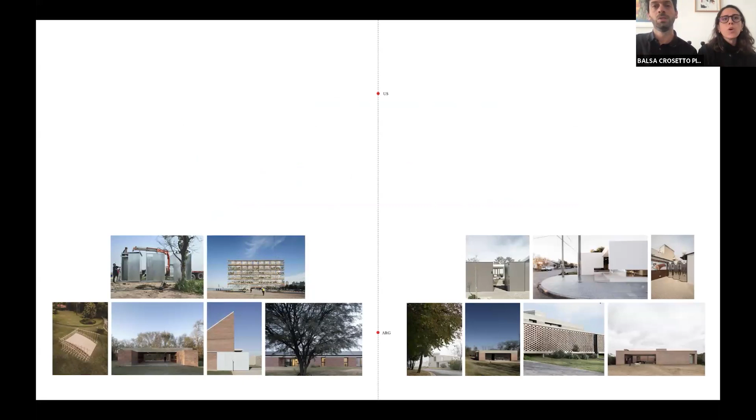Both territories, the US and Argentina, are crucial to our work. Argentina has allowed us to design and build projects that are central to the formation of our office, while the US has given us the opportunity to be part of relevant disciplinary discussions, to engage in other types of projects which are the test ground of new ideas, such as installations and exhibitions, and very importantly, to teach and to be part of the American academia.

From the start of our work as Balsa Crosetto Piazzi, we have been obsessed with popular, vernacular, and productive infrastructures, especially those found along the roadside. We spent many hours on the car driving from one construction site to the other, and these particular architectures started to create a strong visual inventory for our work. This obsession remains with us now in the US. These architectures have become reference for our projects and the built stories that live within them.

Episode 1, Designed to Disappear. The first project of this episode is the Bial Pavilion. This is the city of Rosario, an Argentinian city on the banks of the Paraná River. Rosario is Argentina's second largest port, and this is where the project is located.

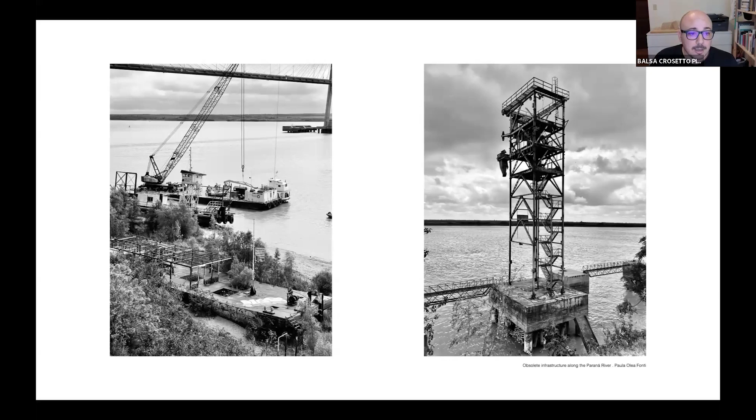The opportunity for the pavilion arose for an open competition for the 2014 Ibero-American Architecture Bienal, the BIAL, and the competition brief called for the design and the construction of a temporary pavilion in a public space located within the port. The project will be situated in a small plaza between the two warehouses that will house the biennial exhibitions, a site historically marked by ephemeral port infrastructures once used to load the ships. We chose to celebrate this story through a pavilion whose tectonic expression will recall these forgotten architectures.

The competition imposed two key constraints that define the project's strategy. The first one, a very small budget for the required square meters, and secondly, the pavilion had to rest on historic paving, which could not be damaged during the 3 months of the installation period.

Given these constraints, we decided to rent scaffolding for the 3 months, as it was a structural system we could borrow and adapt for this project. At the same time, the system allowed us to explore an architectural language where both assembly and disassembly became an integral part of the design process. After its use for the event, the pavilion will totally disappear, ready to become part of the new architectures elsewhere.

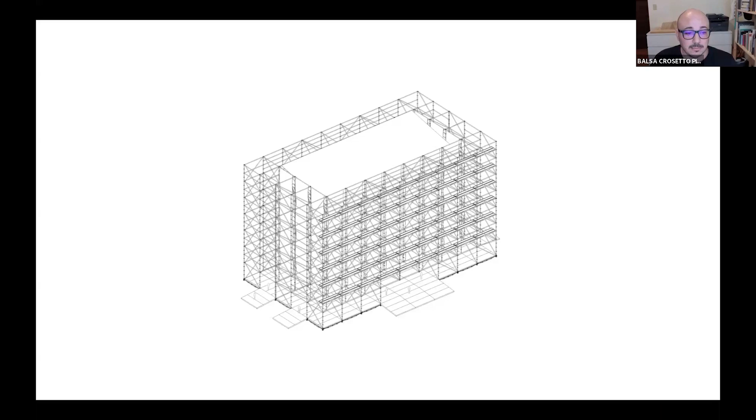We had only 3 months to design the pavilion, so choosing a modular, ready-made, and quick assembly structural system allowed us to reduce the technical complexity of the project. Construction took only 3 days.

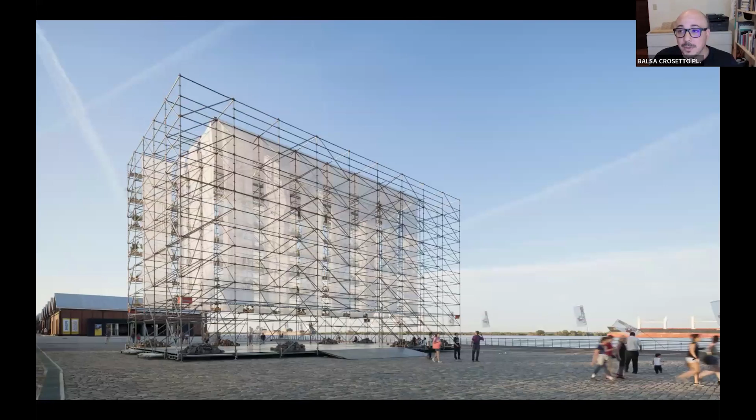The result was a structure gradually inhabited by plants and fabrics that move within the wind of the Paraná River. Inside, the pavilion had no specific program. It became an open space that enabled public activities for the biennial.

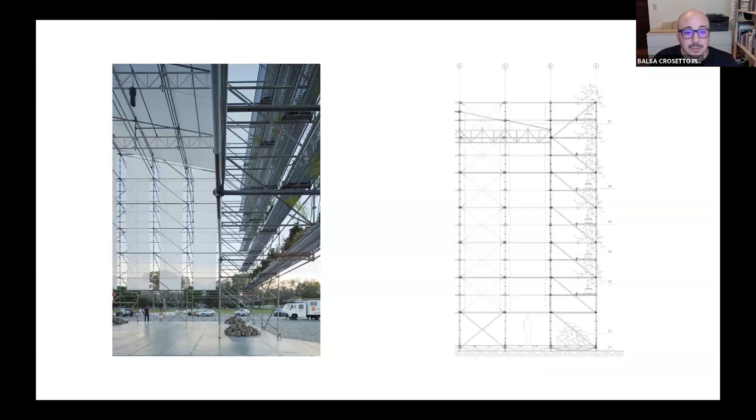All the efforts were focused on defining the tectonics. The enclosures were made with a type of fabric commonly used in local agriculture. The plants and stones were borrowed and returned to the municipality after the event.

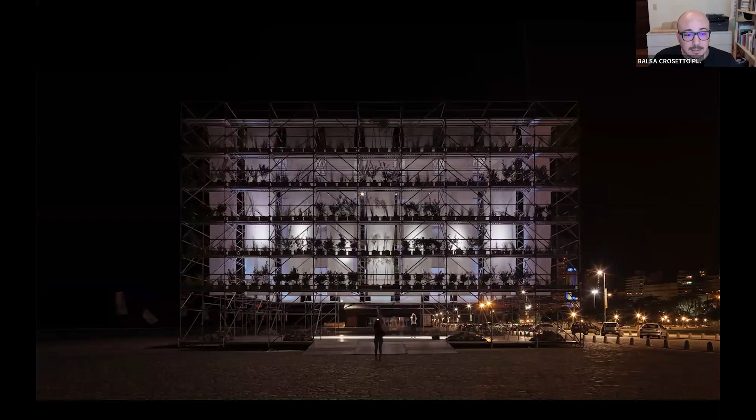The second project of this episode is Rise Repeat. This project is located on the outskirts of Bethel in upstate New York, and it was built within the Bethel Woods Center for the Arts on the historic site of Woodstock 69.

The project was part of an open competition for the Build Fest 2024, which called for the design and construction of a semi-temporary pavilion to be built in just 3 days.

In order to meet this constraint, we studied common construction systems in upstate New York that use off-the-shelf components. So for reasons of cost, efficiency, and speed of assembly, we ultimately decided to build the project almost entirely out of outdoor stair stringers.

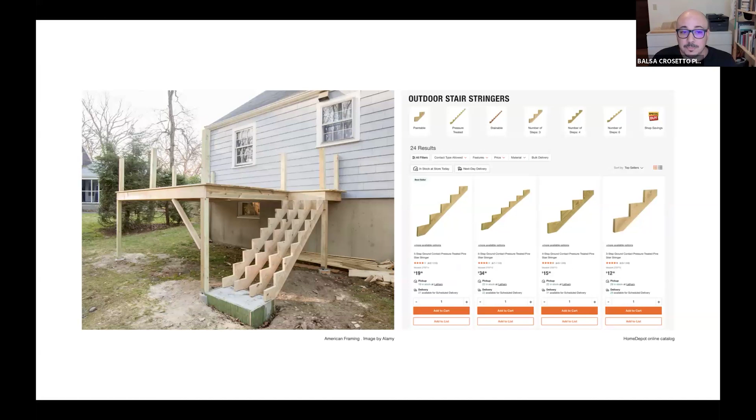It was very important for us that the project's environmental impact be as low as possible. To achieve this, we studied the material life cycle of this component and proposed a design that will allow the pavilion, after its life in Bethel, to be disassembled and reintegrated into its usual life, eventually living on as a part of domestic structures within the Bethel community.

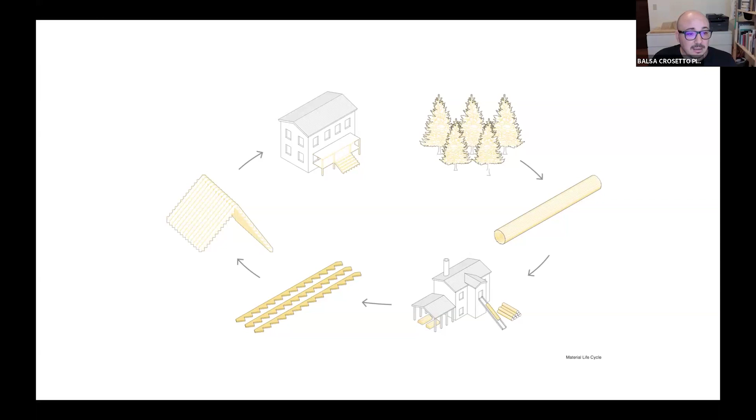Finally, the pavilion is this simple system of wooden porticos that aims to blend into the natural landscape of Bethel. The scale of the pavilion is almost domestic, serving as infrastructure for resting and providing shade, inviting visitors to pause and take in the surrounding landscape. Ultimately, the pavilion is a device for reflection, playfully bringing the everyday domestic component into the public ground.

Episode 2, Small Things in Large Spaces, or Other Ways to Deal with Scale.

These two projects that we will show now in this episode explore the concept of smallness and how projects of a few square meters dialogue with vast spaces, either the expansive territory of the Argentinian agrarian pampas or large industrial interiors.

Rural Restrooms is a project located in the countryside of southern Córdoba, specifically on a family-owned dairy farm. The project emerges from the need to provide additional outdoor restrooms for the workers here.

The particular landscape of the Pampas is defined by its infinite horizon that extends as far as our eyes can reach. However, when visiting the site multiple times, we realized that this infinite landscape was actually inhabited by multiple small-scale productive artifacts, very contextual to the site, such as strange carts for multiple uses, billboards, or agrarian machines.

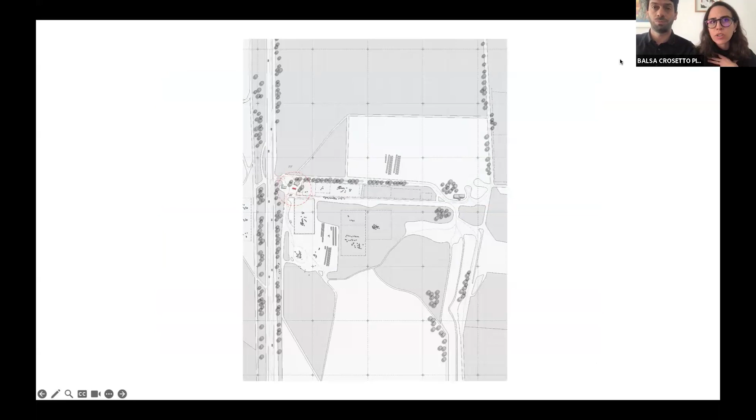This made us think of the project also as a small infrastructure that could set a dialogue with the heterogeneous territory where it was going to be placed.

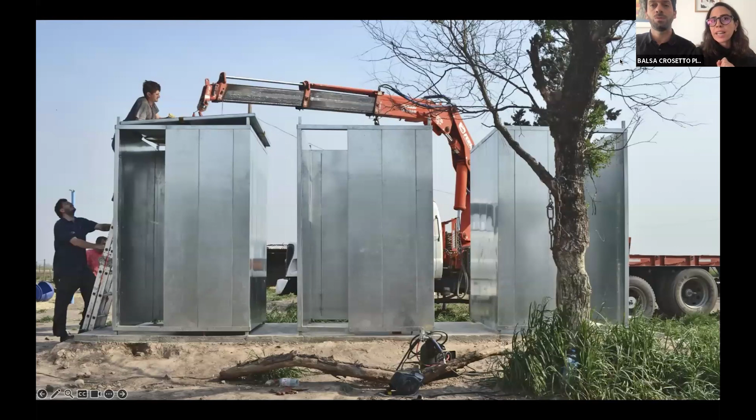We decided to create then 3 boxes, made only by folded sheets of galvanized steel, a material recurrent in this rural site. The galvanized material is crucial for the project as it resists the tough conditions of the rural outdoors: dirt, rain, wind, and sand.

By folding the galvanized sheets, we were able to use only one material, both as structure, enclosure, and finish for the project, a material that also requires zero maintenance.

The whole project was built by 2 local masons, and this man, Rodrigo, the metal worker, or herrero as we say in Spanish, who made the restrooms in his metal workshop and then installed them on the site.

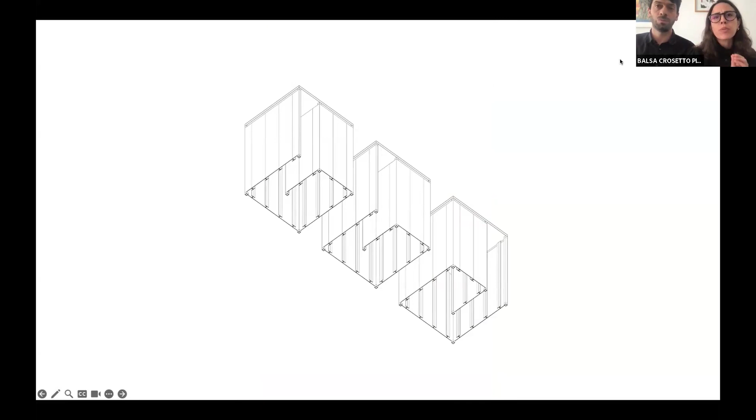The bathrooms are conceived basically as 3 small spaces, 3 small rooms, each offering a separate toilet or shower. For this, we studied the module of the metal sheets and defined 2 ways of cutting them and 4 ways of folding them, which gave us 4 different types of pieces, A, B, C, and D, with zero waste of material.

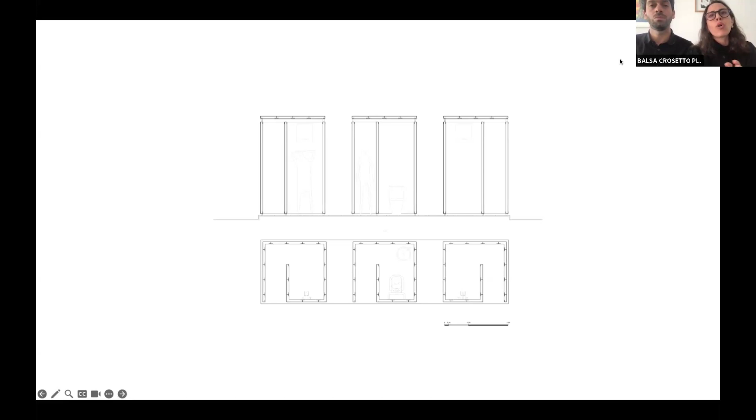Regarding the plan and the section, the project seeks to eliminate both doors and windows. The plan is the outcome of a spiral-shaped layout that replaces the door with an entrance, and the section replaces the windows with just a separation between the metal panels and the concrete floor and the ceiling.

Once the galvanized pieces were assembled, we mounted them on a truck and transported them to the farm. There, within one afternoon, we installed them.

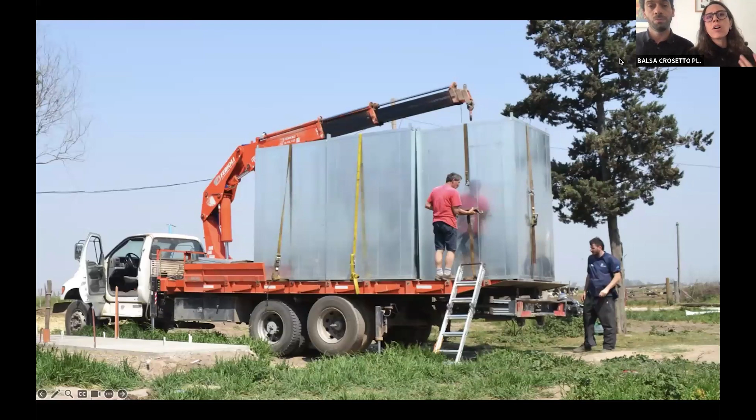Something really beautiful about this project that we discovered while installing it were the reflections that the galvanized sheets captured from the landscape.

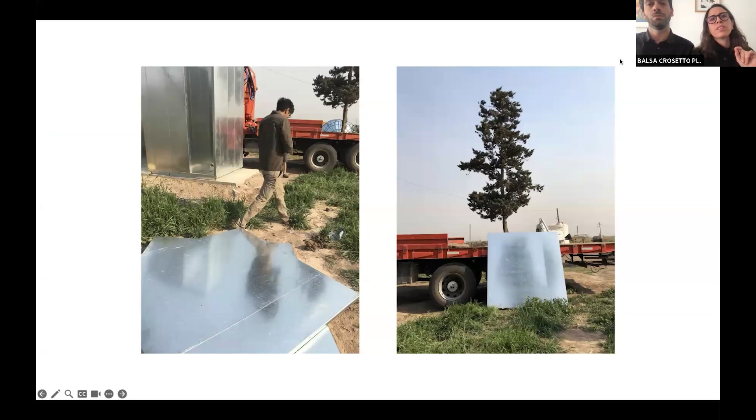Once they were located in place, the panels reproduced the sky and the grass around, giving this small intervention the opportunity to hold deeper and broader dialogues with its context, and even reflect the lights at night, becoming at last another piece of rural infrastructure like the silos for miles around.

The following project is named Animas, and it tackles the challenges of adaptation and reuse of large, if not huge, industrial buildings. The project is located in Syracuse, New York, a city that in the early 20th century was part of the Northern Steel Belt, later renamed the Rust Belt, together with other cities such as Detroit, Chicago, or Buffalo. This condition, common to all industrial cities, created an extraordinary number of buildings that remained abandoned and unused, many occupying large plots in key areas of their cities. The Gear Block, the building in which the project is located, is one of them.

The clients who bought this building during the pandemic wanted to transform it into a communal space, focusing especially on local teenagers and kids, providing areas for art workshops, education, mental health, and events. The building is cataloged as heritage and was previously a truck factory in the 1930s, later becoming the site of the Strathmore Paint Factory, traces of which can still be found on the walls. The Gear Block has multiple fantastic spaces inside: an area intended as a ballet room on the 3rd floor, one on the ground floor that will become an art gallery, the shed for events, the old paint laboratory, and the fabulous basement.

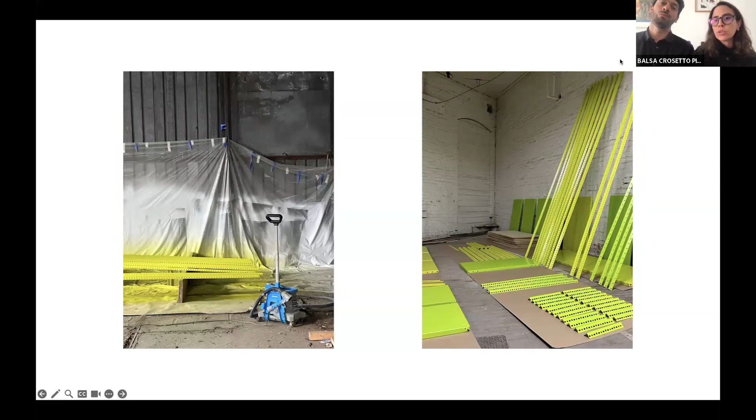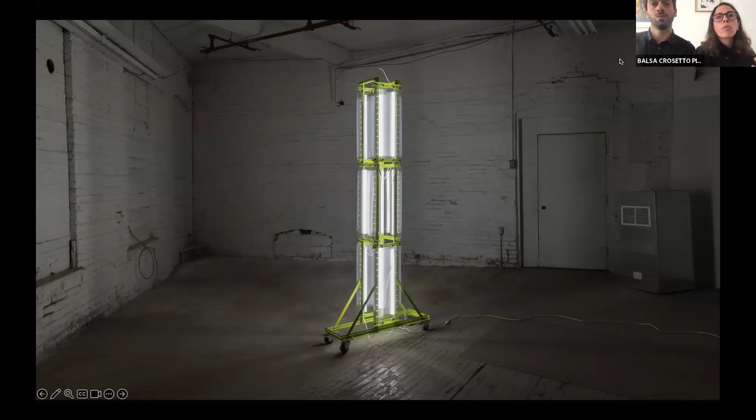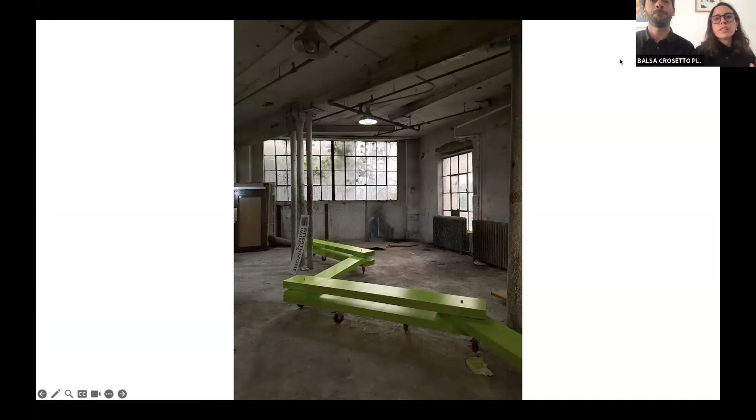Animas is centered on producing a series of architectural elements such as columns, walls, platforms, curtains, pyramids, and benches, as a strategy to activate and occupy the building. This one, called the centipede, is a bench that can take multiple configurations thanks to a pivot point that operates as a joint between the wood planks. We also built platforms for events and performances using found materials, assembled translucent walls to divide spaces, installed curtains used for projections, and created other devices shaped as pyramids, along with very small ones we called mosquitoes.

These elements can move around the building, occupying the basement full of yellow columns, the gallery space on the ground floor, or even being placed all together inside the shed for events. Animas is mostly a project about small transformations for large-scale adaptations. It's a test for quick ways to reoccupy an existing space, and probably an alternative to hack the system a little while larger, more complex rehabilitation efforts are still being approved.

Episode 3: Heavy, Wet, and Dry.

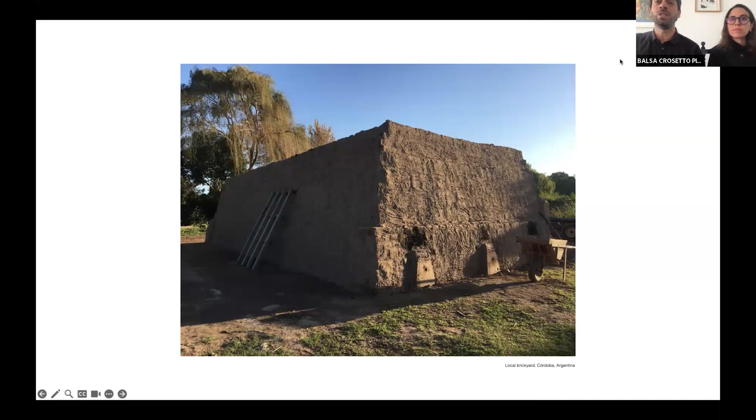The first project is called Quincho. This project is very special to us because it's connected to one of the most important cultural traditions in Argentina, the asado, the barbecue. Córdoba is very popular for its handmade bricks. Cortaderos is the name given to the place where bricks are made. They use natural soil, cut and dried in the sun, then cooked in large ovens also made of mud, as seen in these images. They gain the red color of the clay contained in the natural soil of Córdoba.

To the west of the city of Córdoba lies Sierras de Córdoba, a landscape of small mountains and rivers. In the first valley of this mountainous region lies Lake San Roque, located 30 kilometers from the city of Córdoba. It's a popular getaway spot for city dwellers looking for a break. At the point where the mountains meet the water, we had the opportunity to build a quincho for a family from Córdoba who frequently travel here for rest and recreation.

The construction process was simple. We involved a small local team of builders and used materials available in the area.

The project defines itself as an abstract object that gently integrates into the natural context. We're very interested in the search for a certain geometric abstraction in our work, while at the same time, we operate with a site-specific logic regarding the materials and construction techniques used in each project.

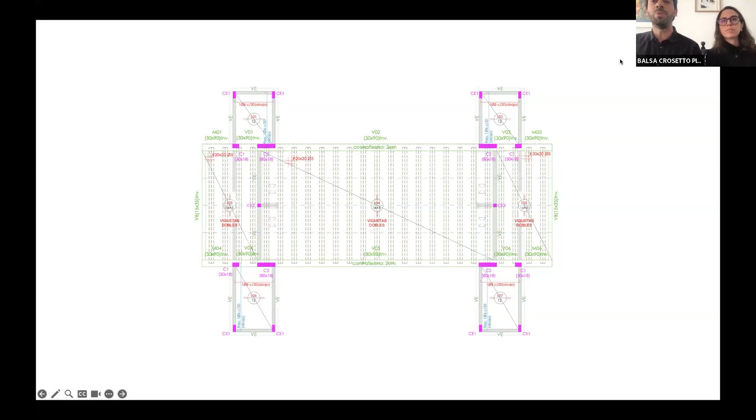We drew very few plans for this project, and the project was mostly built with only one plan, the structural plan. And this made total sense to us. We were essentially building a roof.

The roof is made from small concrete precast beams, which are the most common building material for roofs in Argentina. They are light, so they can be moved by only 2 people.

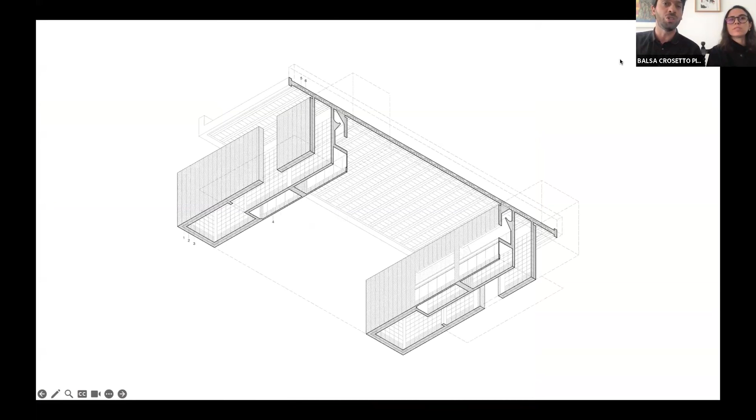The wall thickened to house 2 grills, 2 bathrooms, and 2 storage rooms, while supporting the main space for the asado ritual. They hold the service while allowing nature to flow through the quincho, giving the sensation of barbecuing in the open air. Minimal details and unfinished aesthetic reflect an attitude of responsibility and pragmatism.

No ceilings were added, leaving the precast roof exposed. Electrical wiring runs externally, simplifying construction and reducing future maintenance costs. The quincho operates as an outdoor structure that protects us from the sun and the rain. A small pagan temple hidden in Córdoba where the rite of the asado is collectively celebrated.

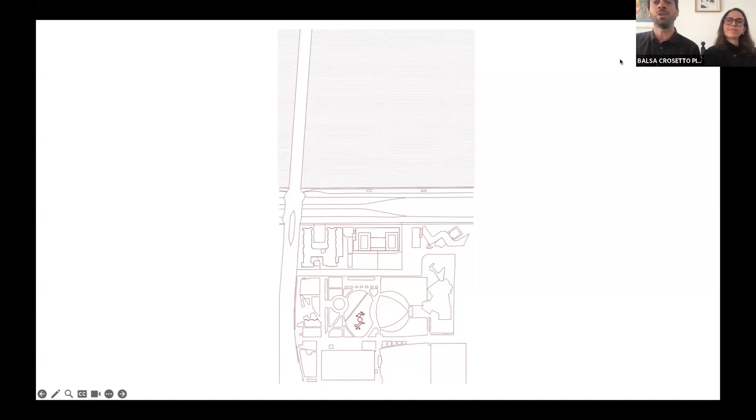The last project we will show you today is 12 Rooms, a pavilion designed for MIT in the city of Cambridge, Massachusetts. Sitting between the 2 Eero Saarinen buildings, the chapel and the auditorium, and in proximity to the Charles River, the pavilion emerged as a brick line, a long, shallow, well-described oval.

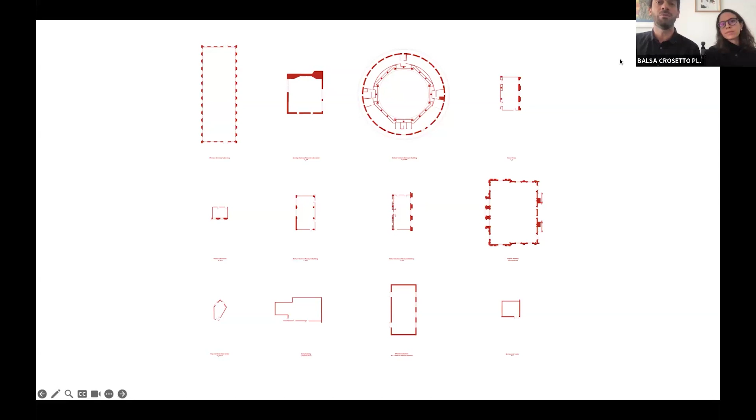This composition of 12 rooms reconstructs the space at MIT where pivotal inventions and research were born. From the telephone and the first digital computer to early prototypes of email, these innovations are inseparable from the labs, lecture halls, classrooms, and offices at MIT, some of which now exist only in memory, remnants of buildings that were demolished. 12 Rooms is between documenting the past and constructing the traces of a new possible space in the present.

The project is an invitation to reflect on the built stories that live in the building with inhabitants, dialogues, and inventions that are part of the room's memory, through the use of brick, a resource strongly tied to Cambridge's history and built environment.

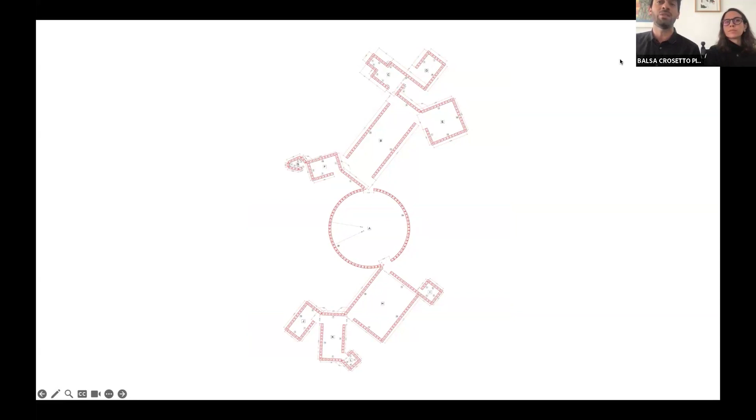12 Rooms assembles a selection of rooms spanning time and space. By extracting the footprints of these rooms, we craft a new spatial composition that allows visitors to step back into the spaces and learn about the groundbreaking inventions that took place within them. The installation is both a reconstruction of old spaces and the trace of a new possible collective space.

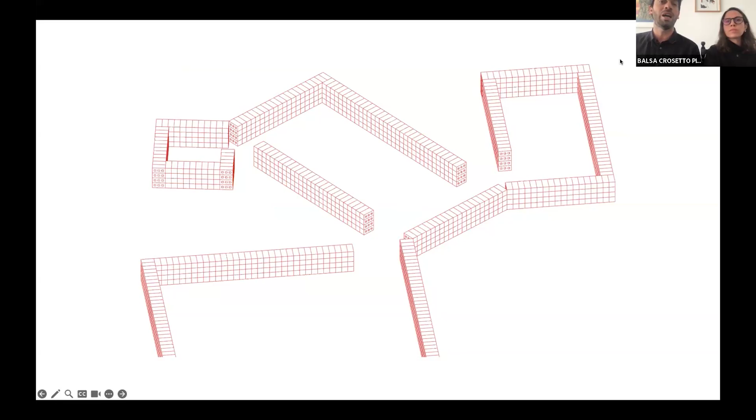The bricks are dry-stacked and tied together in packs of 12 units, a method that allowed for the quick setup of the installation and made it possible to reuse the materials after the project ends. The bricks used in this project were donated by a masonry supplier based in New England. Once the project was completed, the bricks were donated again for the construction of a bike path in New Hampshire.

In this project, one moved beyond time and space to enable other forms of collectiveness and inhabitation. Walls make rooms for things to happen. They are solid and tangible. They are also political. Walls can enable or divide, conceal or protect, separate or hold together.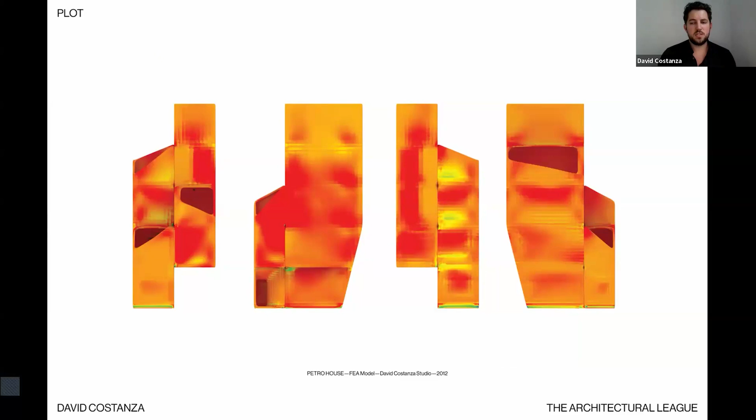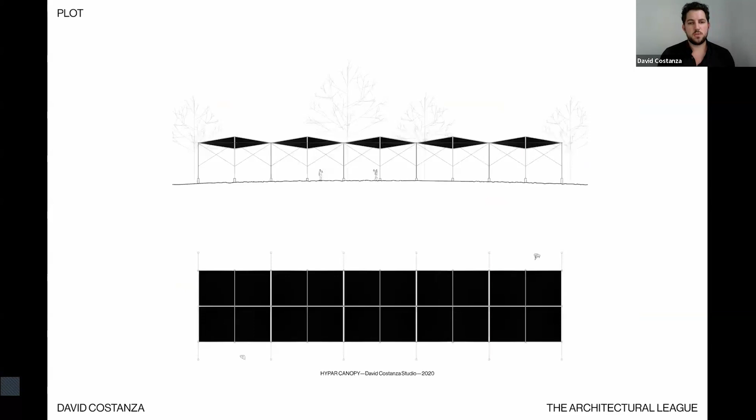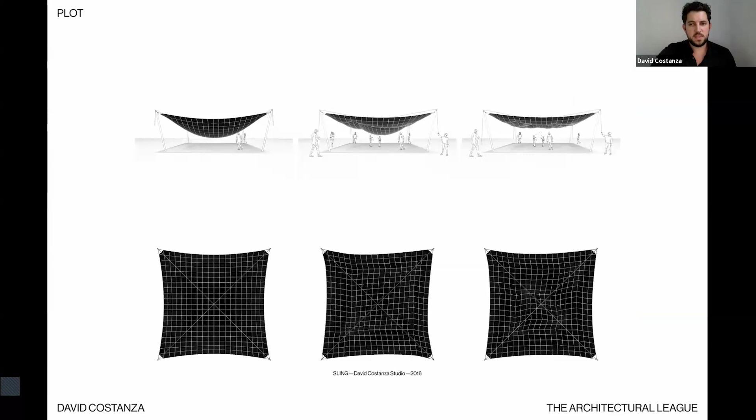So my teaching, research, and practice bridges across design and building, engaging in the reciprocity between how we build and how we design. The work itself is interdisciplinary, overlapping with structural engineering, material science, and computer science. Simultaneously, the work is grounded in architectural expertise, cutting across design, representation, fabrication, computation, and building technology.

In 2015, I established the design office David Costanza Studio, or DCS. Through material experiments, installations, and exhibitions, the studio's work addressed the role of digital processes in architecture, synthesizing the fracture between material constructions and digital technologies.

Thus, the computation, fabrication, and material experimentation came together in a mutually supportive framework, in which the drivers and constraints embedded in material translations informed the design process. The capacity to move fluidly between design, analysis, simulation, machine programming, and fabrication was at the core of the practice.

Over the years, the experiences and prototypes developed in the studio formed distinct research streams that define my current work. The ideas and knowledge acquired through the simultaneous process of designing and constructing, essentially thinking while making, began to expand. And this growth sparked a desire to further enhance my research by exploring the broader connections between building technology and design.

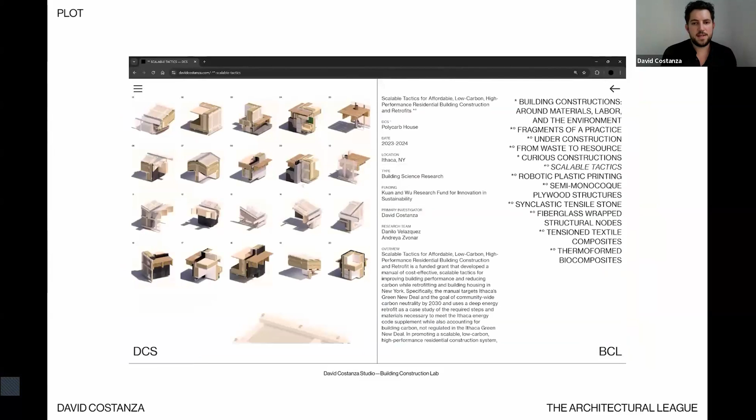This is why, in 2020, I established the Building Construction Lab, or BCL, to advance these research streams further. Each design project, installation, or exhibition became one instantiation of an ongoing research question.

In this way, the Building Construction Lab synthesizes design and research, thinking and making, operating as a framework to interrogate the role of recycled materials, waste materials, prefabrication, labor, and affordability in architecture through the lens of building technology and construction.

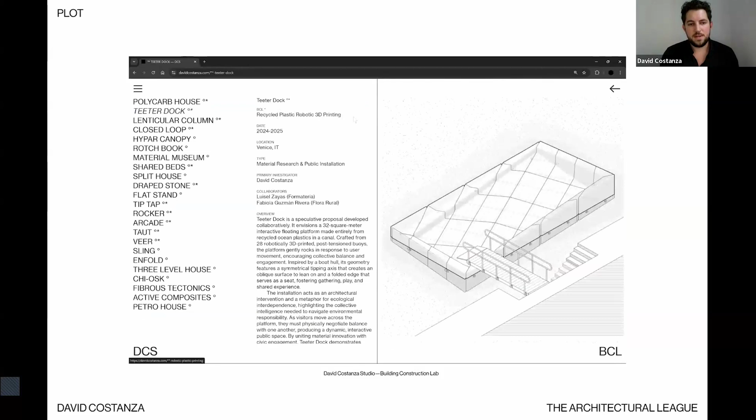So here in the slide, you can see the design studio on the left and the research lab on the right, and the oscillation between ongoing lab projects and instantiations in the design studio on the left.

So this shift also responded to a growing awareness within the architecture discipline of the building industry's effects on the planet. As an architect teaching and practicing during the climate crisis, I felt compelled to examine the role the built environment had in shaping it.

Buildings create about 40% of the world's carbon dioxide emissions, and this fact alone demands that architects rethink how we design and build. To do so, we must interrogate the tools we use to design, the materials we use to build, how and where we build, and what impacts these decisions have on the environment.

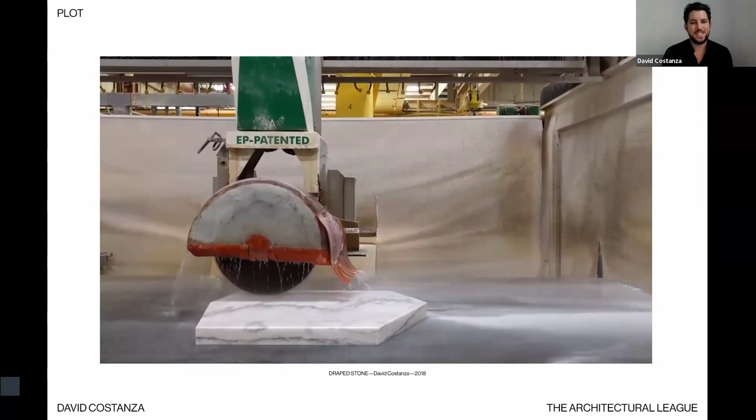These questions can be answered by challenging the role of building construction, not just as an essential stage in the materialization of architecture, but also as a constitutive site for knowledge production. Thus, three main research streams emerged by concentrating on building construction as the driver informing my design practice.

The first stream examines ideas around materials, including low carbon materials, recycling, reuse, life cycle, and affordability.

The second stream deals with construction, which includes understanding and working with diverse labor practices, the effects of automation on de-skilling of construction workers, as well as investigating new applications of prefabrication, digital manufacturing, and robotics.

And finally, the third stream addresses the environment, thinking seriously about what decarbonization means for architecture, how high-performance buildings can be achieved at lower costs, and what alternatives might exist to practices that rely heavily on the extraction of natural resources. These streams, discrete as they may appear, are never studied in isolation, but crisscross each other in my work.

And these research streams interrogate how methods of production condition and shape the materiality, the constructability, and environments in which works of architecture emerge. They seek to identify effective measures for reducing emissions and eliminating extractive and exploitative practices associated with architecture.

My goal is that by elevating building construction knowledge as the inherent site of architectural expertise, a better understanding of materials, construction, and the environment, and the knowledge that emerges from their intersection will inform an architecture that addresses the environmental, social, and cultural impacts of building buildings. For example, the materials we use to build are central to reducing architecture's environmental impact.

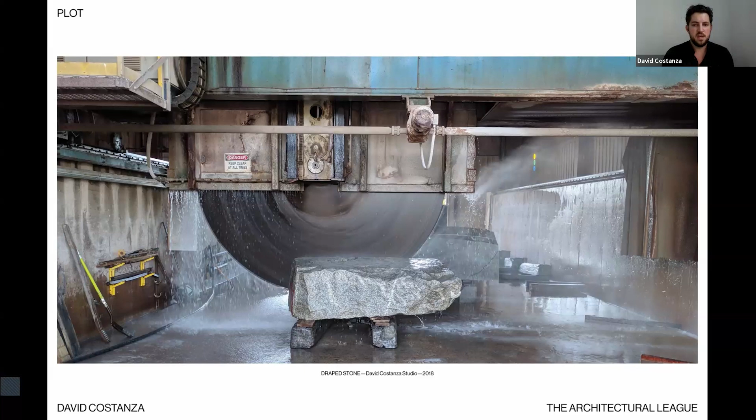Therefore, in my research, the materials focus is studying those of life cycles. Consider my work with plastics. The importance of this research lies in reframing plastics, viewing them not as cheap and disposable, but as essential and irreplaceable. Plastic materials and mechanical properties are essential to building construction and cannot be overlooked.

But a shift from single-use to recyclable plastics, and from non-renewable synthetics to renewable bioplastics, positions this material as not only impervious, durable, and affordable, but also sustainable. In short, a shift from waste to a resource.

Here are a few examples of previous projects that illustrate my approach using plastics in my work. VEER, a collaboration with my colleague Andrew Colopy, investigates the use of waste streams to be upcycled and utilized structurally, informed by material constraints and manufacturing limitations, resulting in a furniture prototype. The material used consists of 60% rice husk fibers, an agricultural byproduct, and 40% recycled PVC, resulting in a fiber-reinforced plastic that offers improved mechanical properties compared to plastic alone.

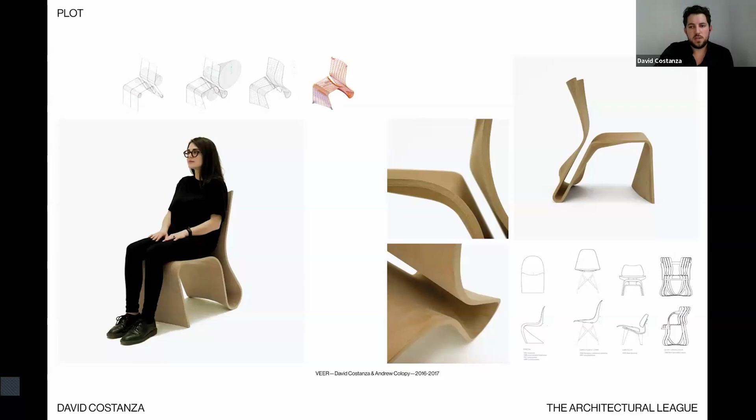The overuse and overproduction of plastics have led to a large accumulation of plastic in the form of pollution. Under these conditions, recycled synthetic plastics already distributed across the planet emerge as a sustainable source material. VEER integrates recycled synthetic plastics with rice husk fibers, which are often burnt at the end of harvest, diverting and repurposing a significant source of pollution, producing a prototype that demonstrates the mechanical, aesthetic, and geometric possibilities of the material.

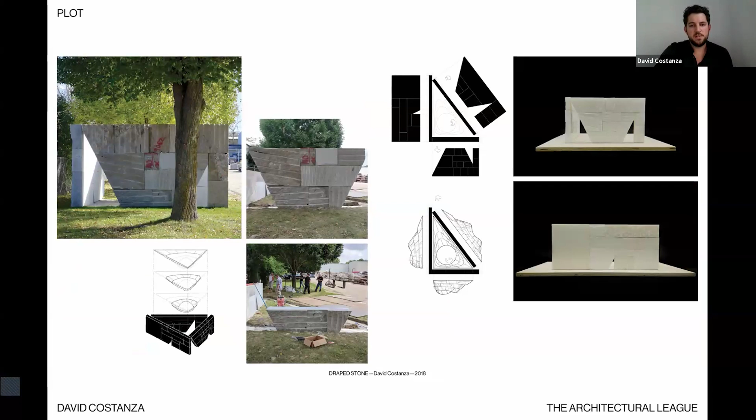Another project is Draped Stone, developed in collaboration with the Cora Stone Company, which investigates the potential to use discarded and low-yield stones in a structural capacity. Many types of stone considered low yield produce vast amounts of waste. The research was guided by the possibility of reinforcing fracture lines and other natural deficiencies in stone with a composite or a plastic, allowing the material to be salvaged and used structurally.

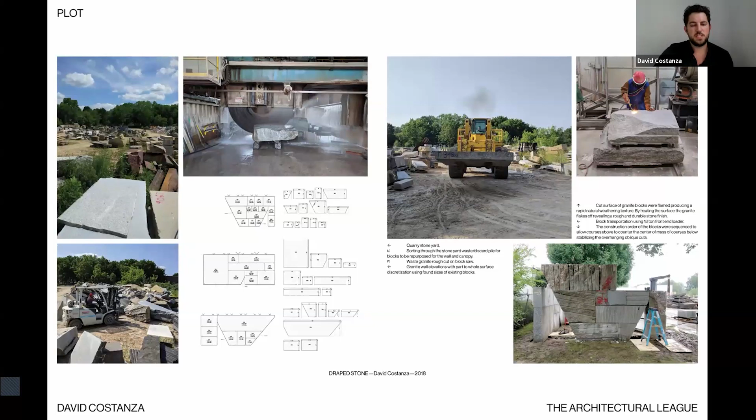The introduction of the composite provided the stone with additional tensile strength, enabling the construction of a hanging granite canopy.

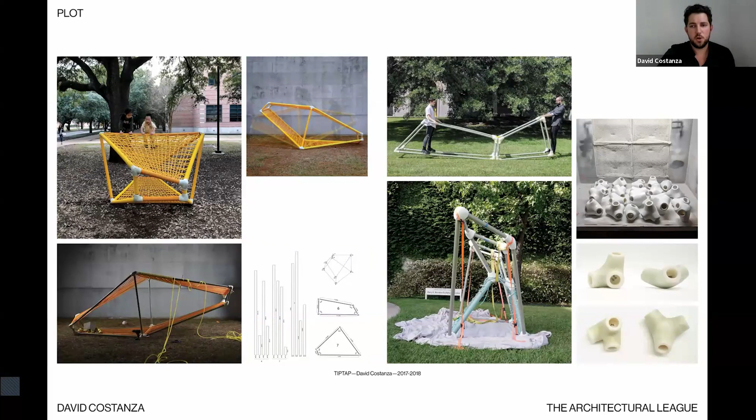In Tip-Tap, bioplastic 3D printing was used as a mold-making technique for a one-off structural node. The node served as the structural connections defining the angles and geometry of the pultruded fiberglass tubes. This structure served as the frame for two woven surfaces, producing an interactive urban object that allowed for sectional occupation. Twisted half-inch polypropylene marine-grade rope was used to construct a soft interface, producing a playful, energetic woven urban object.

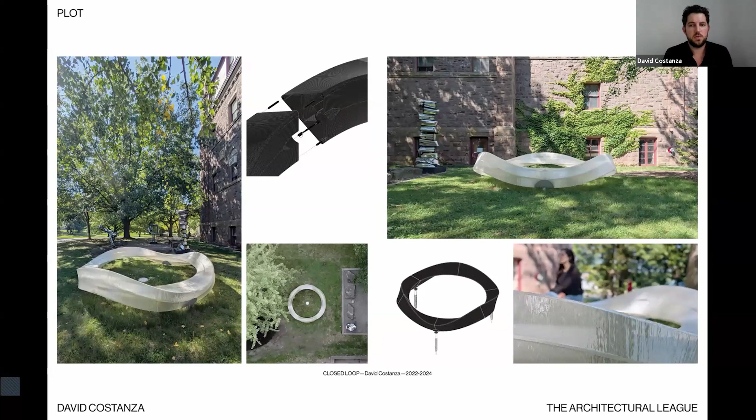Also made using bioplastics is Closed Loop, a public bench manufactured using robotic 5-axis printing. The bench offers a place of pause and rest along primary pedestrian routes on Cornell's campus, aiming to connect often discrete groups or individuals by creating a piece of shared public furniture. Moreover, the project tested the use of bioplastics in structural applications, combined with the automation of production offered by robotic 3D printing.

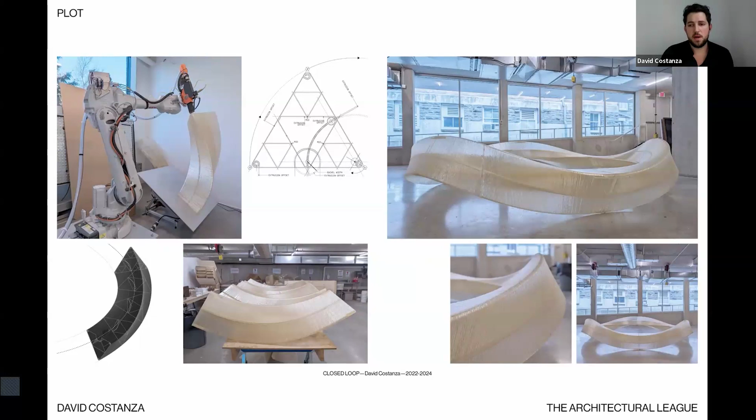Finally, on the use of bioplastics for structural purposes, the Lenticular Column is part of an ongoing grant titled Recycled and Renewable Bioplastics as Alternative Building Components. The research and accompanying building components, in this case a column, aims to demonstrate the capacity for recycled synthetic plastics and renewable bioplastics to perform structurally at an architectural scale through full-scale prototypes, and to develop a workflow for a non-standard automated fabrication process using robotics.

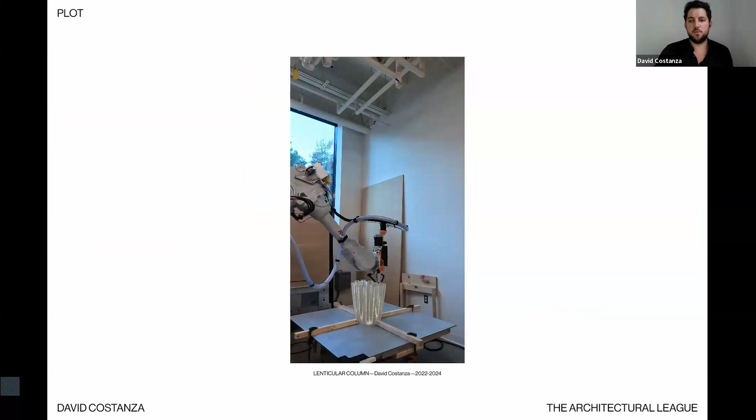The research builds on the processes developed in Closed Loop while beginning to operate at a building scale, so no longer as public furniture. The research continues to expand on robotic 3D printing, offering greater degrees of control while further expanding the scale of the work. Additionally, it reduces the labor required to construct unique, one-off structural plastic components.

These projects demonstrate how an interrogation of building materials is present in my work. Other projects aim to rethink how we build. In this stream of research on construction methods, advancements in automation through digital manufacturing and robotics are evaluated against their potential to impact construction labor.

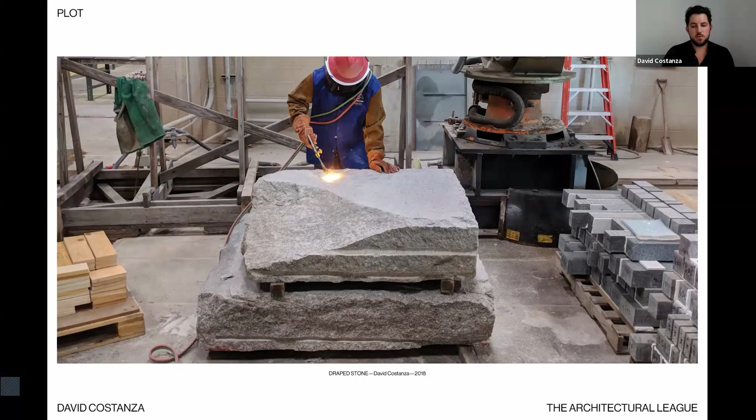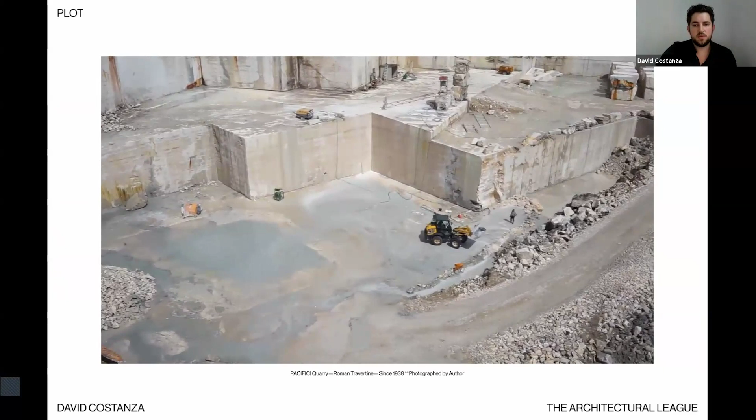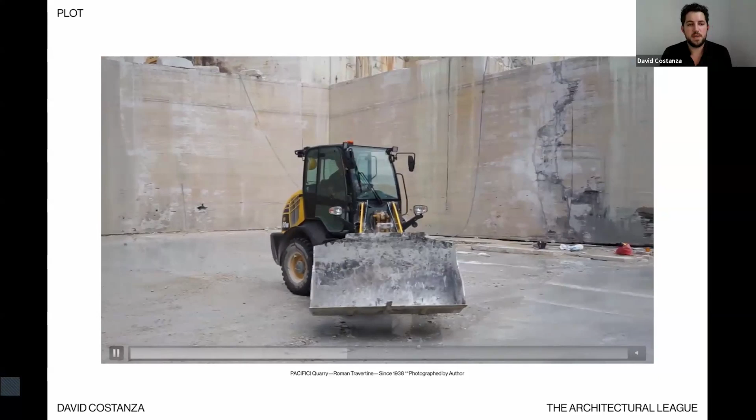It focuses on the labor of construction rather than the labor of production, which refers to the labor required to produce the material products delivered to a building site. When the materials arrive on site, it's a different set of laborers that transform that material through construction.

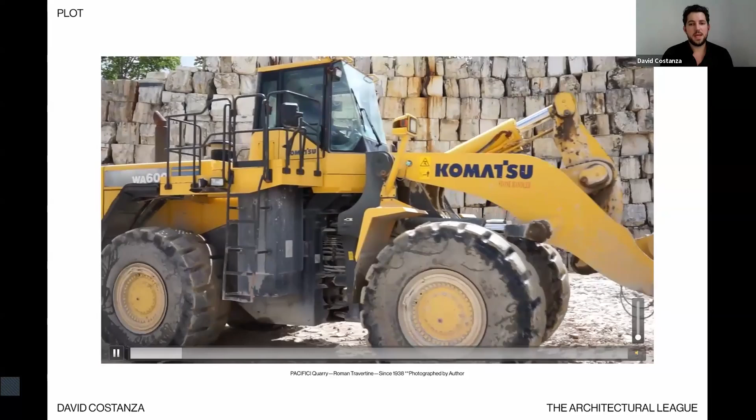In both cases, workers may be at risk. My research highlights the architect's role in shaping labor conditions on site by fostering a critical engagement with construction labor through disciplinary expertise. The following slides present examples of my work where labor is explicitly addressed in both the project's design and conception, as well as its realization.

Taut builds on the work of Frei Otto and the Institute for Lightweight Structures to explore the rapid deployment of tensile structures, which are unmatched in their capacity to enclose large spaces using minimal materials. Taut tackles one of the most challenging aspects of composite manufacturing, which is the production of a mold.

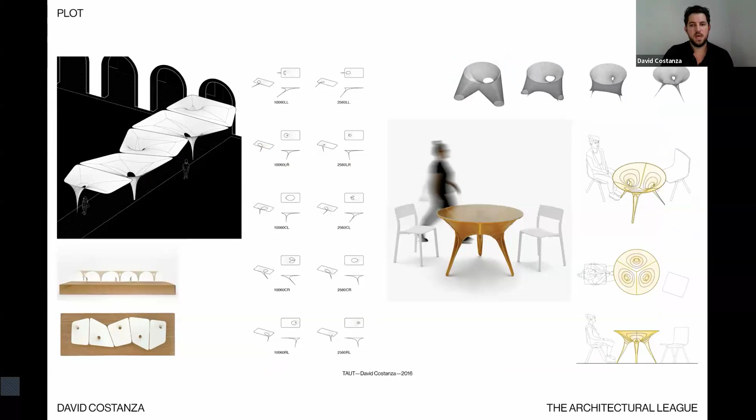It utilizes tensile surface morphologies to define the geometry of a vacuum-assisted, resin-infused textile composite structure. Large custom molds are extremely expensive to construct and only viable when produced in large quantities, benefiting from an economy of scale. Instead, Taut uses a tension surface built with a simple frame and cables, replacing the typically labor-intensive and costly mold. This is made possible through the close alignment of geometry, material, and structure.

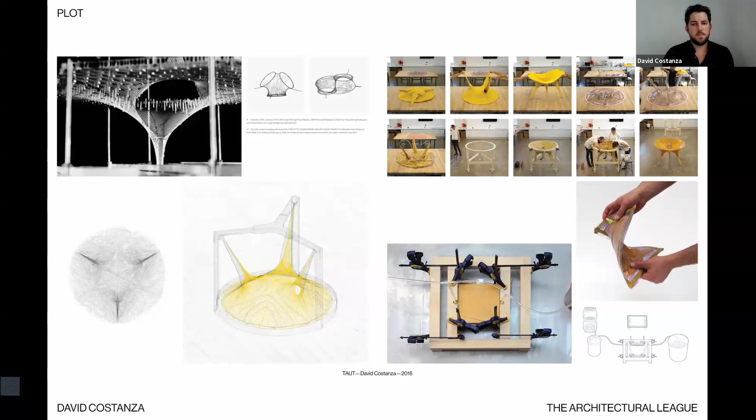And throughout the project, topics of prefabrication, labor, and affordability emerged as key drivers in the research.

The Polycarb House engages in construction directly as a design-build retrofit of an existing building in Ithaca, New York. The speculative research is put into practice as questions for a deep energy retrofit demand the invention of highly specific and quite strange details, prioritizing constructability alongside performance.

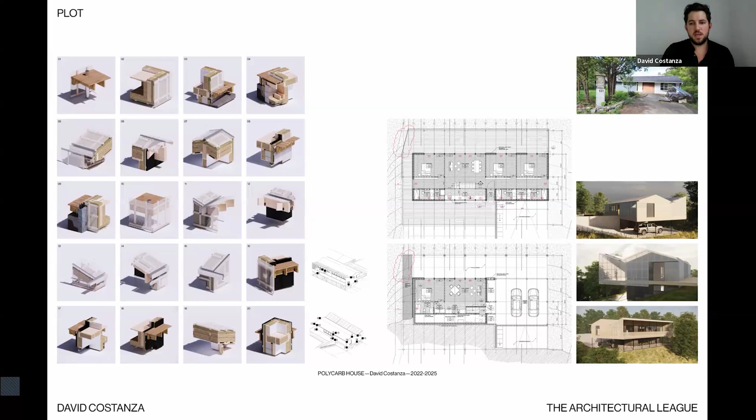In the project, localized planning is necessary to achieve low energy and low carbon standards without compromising costs and without requiring specialized procedures. It also maximizes the preservation of pre-existing structure and material.

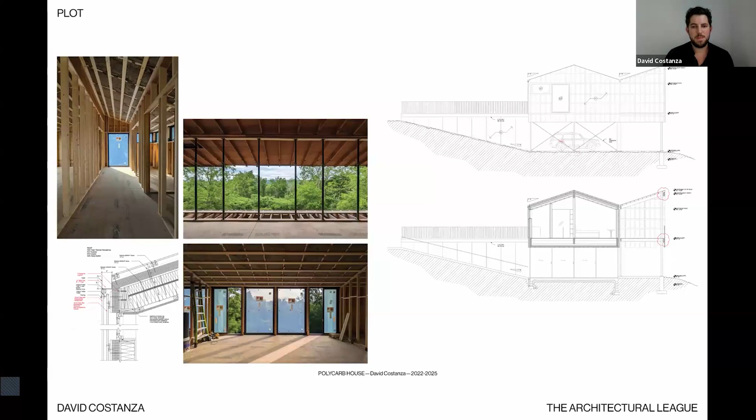However, lowering carbon emissions and improving labor conditions and increasing building performance are only meaningful if they're also affordable. Affordability promotes social equity by ensuring that everyone has access to safe, comfortable, and dignified housing, regardless of their income or background. Thus, the details and the assemblies tested on the Polycarb House are designed so that non-experts can, if needed, replicate the means and methods used to ensure a low-carbon future.

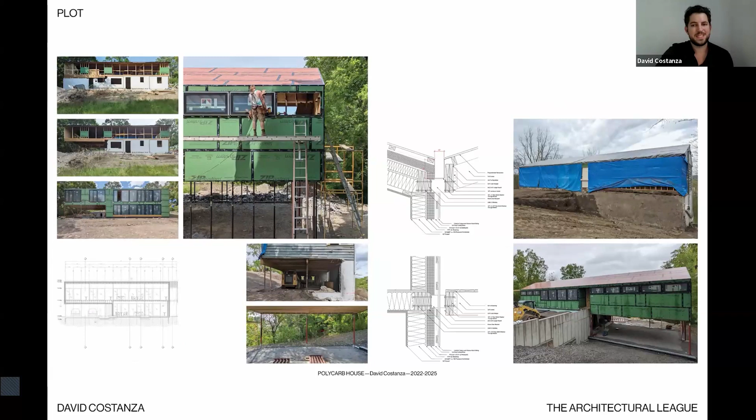Under these premises, the project develops scalable tactics for constructing affordable, high-performance residential buildings, both new construction and retrofits, that result in manuals for cost-effective techniques to improve building performance and limit embodied and operational energy.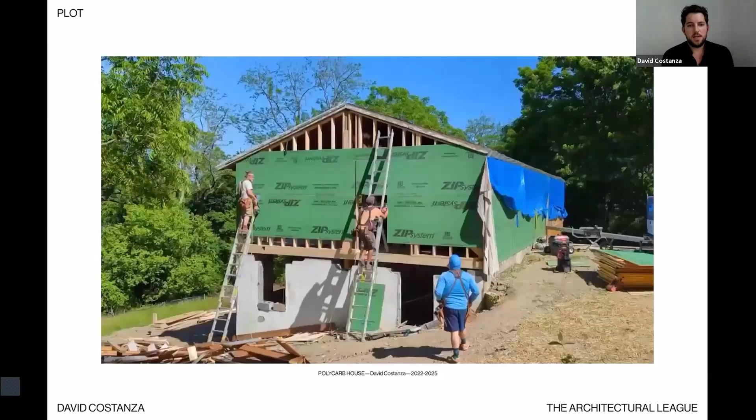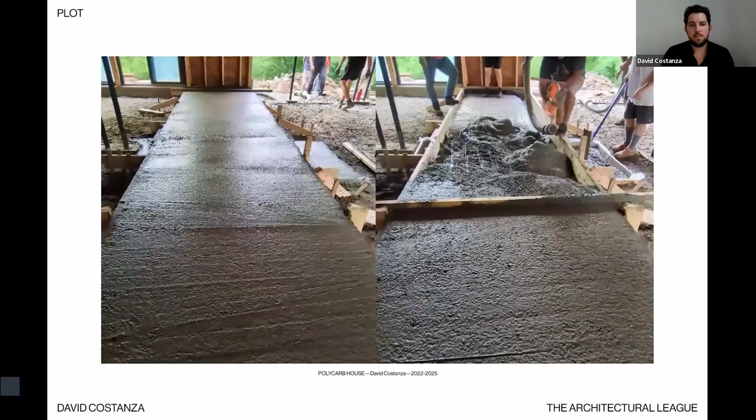The Polycarb House was central to my Arch League exhibition, after which the lecture is titled Under Construction. Under Construction is a 4-part video installation that explores the realities of architectural and spatial production through the lens of labor. Rather than showcasing a completed building and its final photographs, each film captures an active construction site, highlighting a process where architects, workers, and builders engage directly with materials, tools, and construction.

The video documents the execution of a design concept constantly redefined by the context, constraints, and experimentation needed to tinker with the conventional building assembly. This back and forth between design and construction, between architect and builder, shapes each decision.

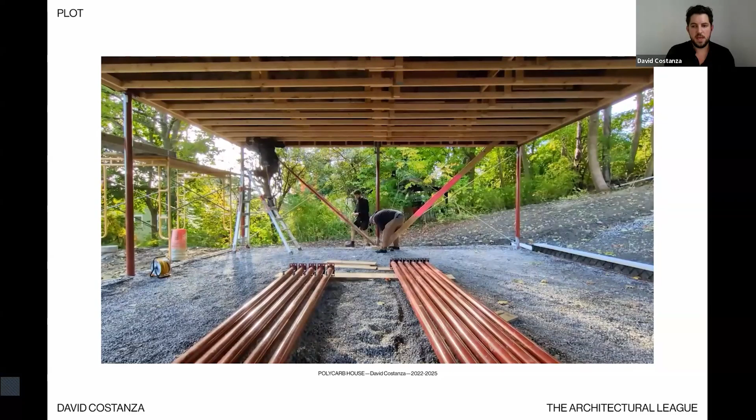It takes viewers from an initial state just before a deep renovation to the current phase of construction process, beginning in 2022 and still ongoing.

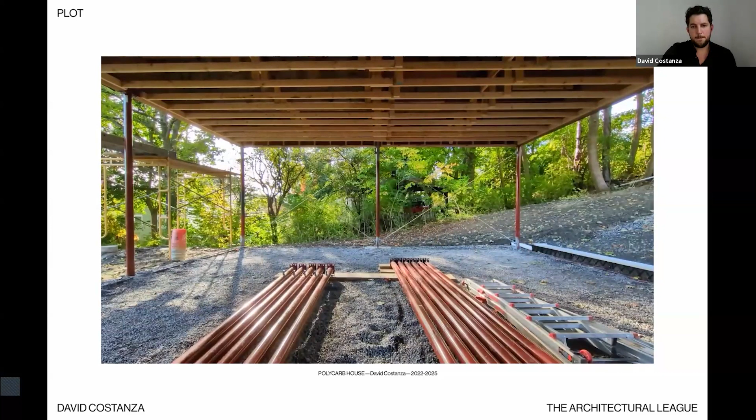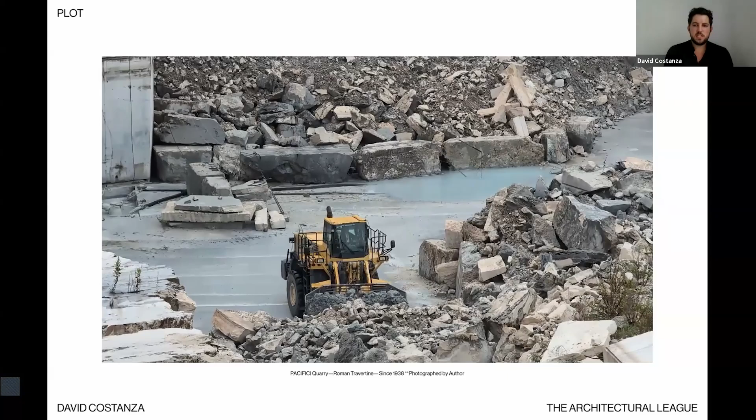Over the last year, I've been at the American Academy in Rome working on a project titled Bending Stone. The project intersects historical stone aesthetics with contemporary stone manufacturing and quarries as the site of stone extraction. Like previous projects, Bending Stone engages with the ongoing discourse around decarbonizing construction and the renewed interest in pre-industrial building methods as alternatives to industrialized materials.

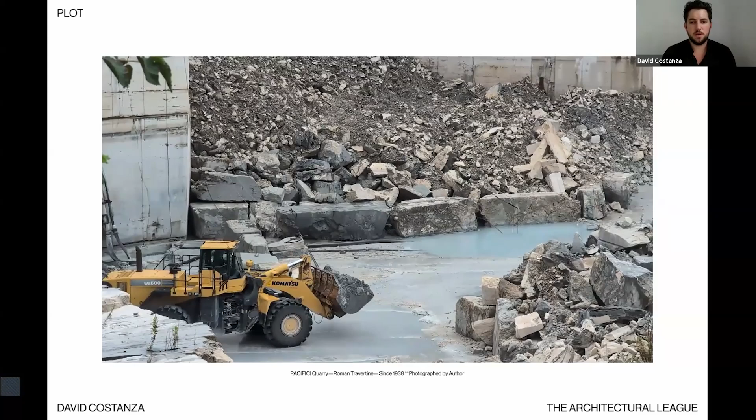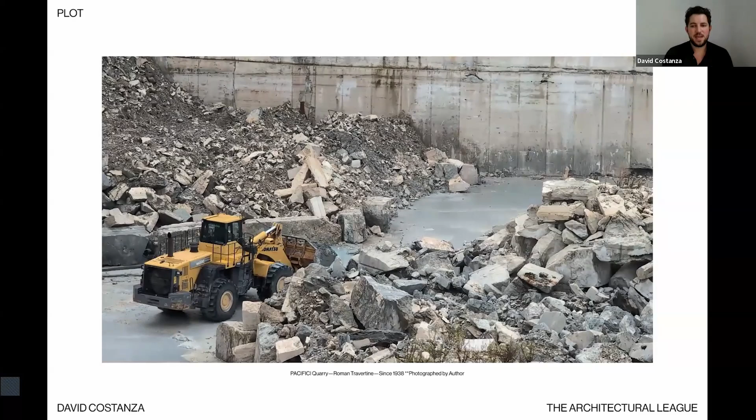On the one hand, stone offers a low-carbon alternative to industrialized high-carbon materials such as steel, glass, brick, and concrete that rely on fossil fuels. On the other hand, stone provides exponentially more building material acre for acre than trees and is globally available. Moreover, by maintaining the integrity of the stone as a monolithic block, solid stone buildings can be quarried in the future.

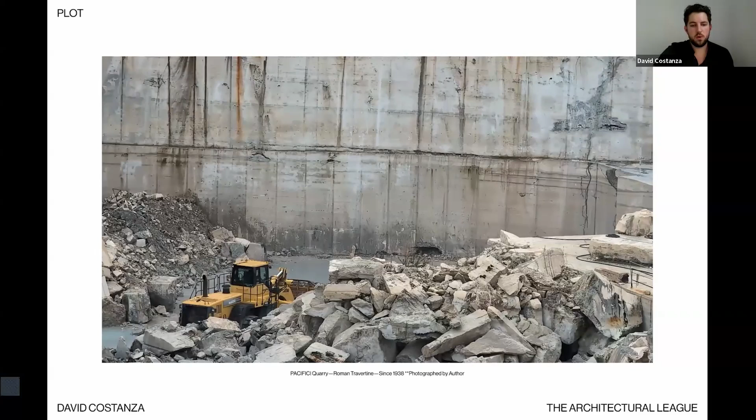These observations may seem common sense, but the most ubiquitous use of stone in construction defies common reason. Stone used today for construction, such as limestone, is typically crushed into a powder and burned in a fossil fuel-intensive process just to make cement. In this case, limestone loses its structural capacity to play a secondary role in concrete's narrative.

But what if stone, both ubiquitous and unfamiliar, were to reemerge as a structural material? Historically, stone made up some of the earliest buildings still standing, and yet in contemporary practice, it's treated as a surface to wrap and clad carbon-intensive, industrialized building systems.

Thus, the goal of the project is to reframe stone as a low-carbon structural building material while exploring the aesthetics of structural stone and defining a new language in contemporary construction.

Analyzing the uses of stone throughout history and the contemporary practices employed in quarries as sites of stone extraction, Bending Stone explores the use of stone for a decarbonized future.

I'd like to end with this project. The themes I've addressed are central to an ongoing book project with Routledge Publishers titled Building Constructions around Materials, Labor, and the Environment. This manuscript provides a theoretical overview and a collection of relevant case studies for the development of design and building technology education.

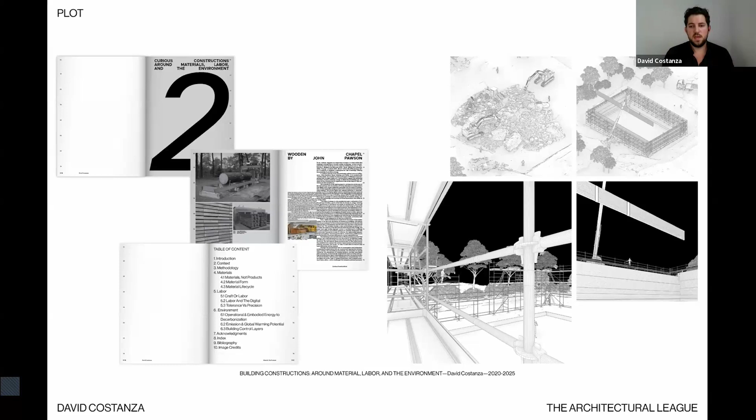Considerations of materials and construction are often disregarded until after a formal resolution has been obtained. Thus, issues of labor and the environment, for example, are not considered during the initial design phase. And this way of working inherently produces buildings where constructability, energy efficiency, workers' conditions on job sites, and costs are often afterthoughts. Inversely, the latter considerations are central to the design conception that the book argues for.

In the book, I argue for localized strategies that center architects' tools and knowledge and how these might inform ways of thinking for those invested in building buildings. The book posits that architecture, though inherently complicit in exacerbating carbon emissions and disregarding construction site labor conditions, can still formulate reparative actions.

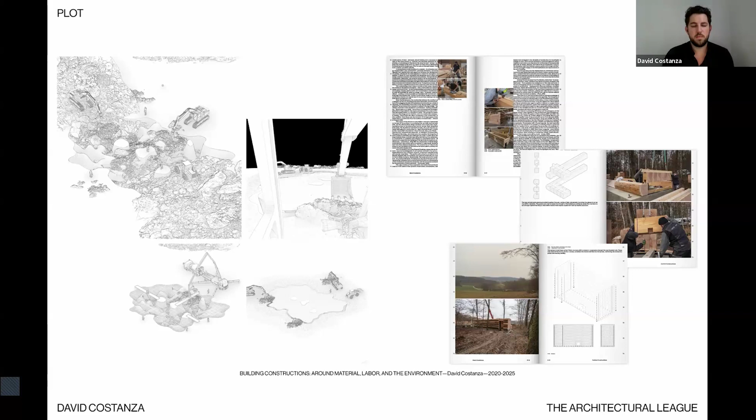To conclude, I'd like to return to the Powers of 10 video. Discussing the movie at a conference in the 1970s, the Eames considered a realignment of values necessary to address the environmental concerns at their time. Decarbonization is not just an ecological or a technical goal, but it's a value that can shape how we assess works of architecture today. Thank you.